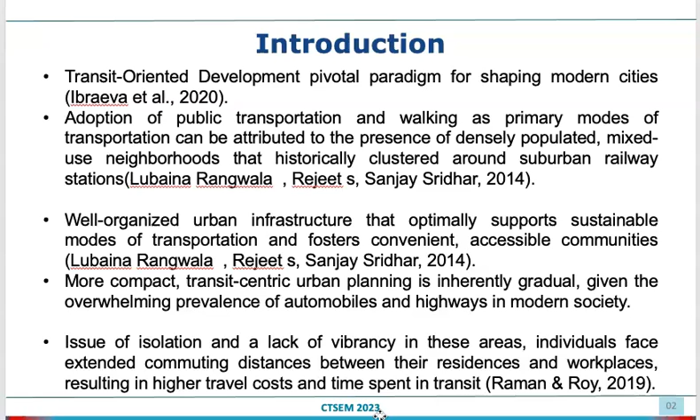So the issue of isolation and lack of vibrancy in the cities can be solved through the use of transit-oriented development. So when we study the case of Delhi, the youth are put to death in road rage. So when there is private transport, there are more chances of road rage or road accidents, and it will also lead to more traffic congestion when more private vehicles run on the roads. Then it creates a lot of traffic problems. But when public transport is promoted, then this traffic problem can be better handled.

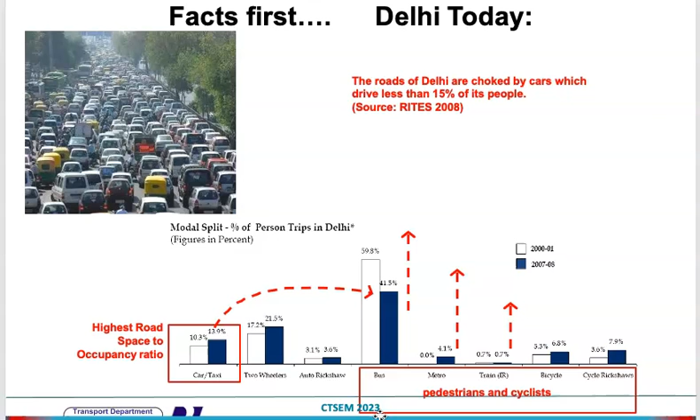So in today's world, the pedestrian and cyclist numbers are very low in metropolitan towns like Delhi. The modal split of person trips in Delhi, you can see from the figure, is very less as compared to other towns.

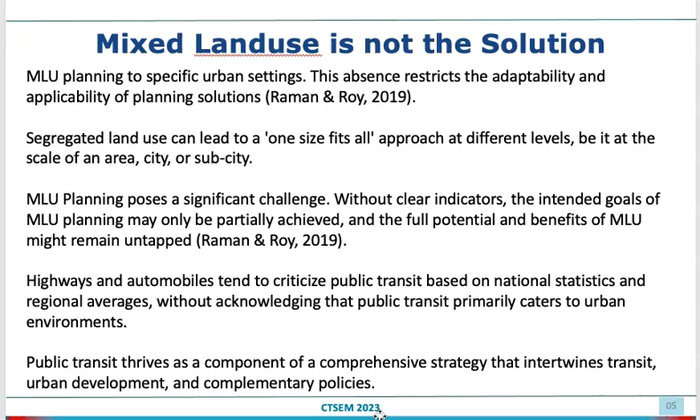So mixed land use alone is not the solution. Multi-level mixed land use planning in an urban setting is something that has been promoted by other scholars. Segregated land use can lead to a one-size-fits-all approach, which is not suitable in many towns. So mixed use development can be better promoted if it is integrated into transit-oriented development.

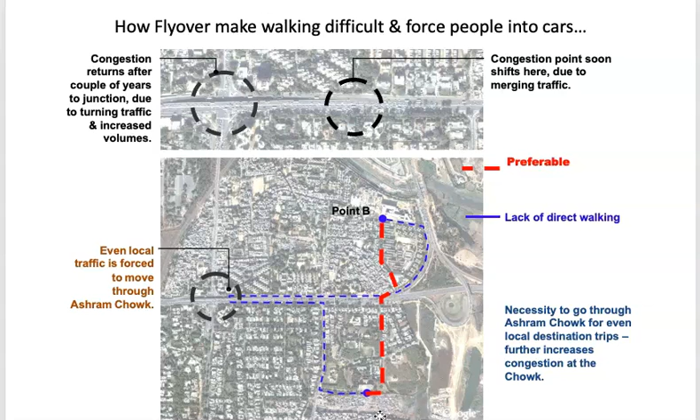How flyovers make walkability difficult and force people into cars. So when you see the case of Delhi, there are many flyovers which prohibit walkability, because when you have to cross from one road to another, you have to go a long way to find a way to cross the road. So this creates problems in walkability.

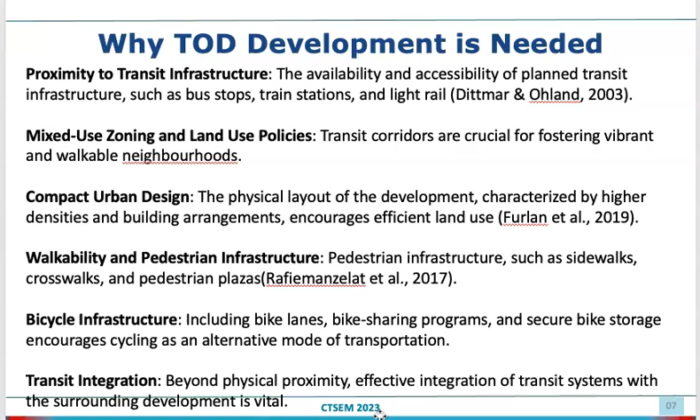So the urban physical layout of the development should be planned so that it is more compact, and it should be enhanced by walkability, and pedestrian infrastructure should be promoted so that people are encouraged to walk. They use sidewalks, crosswalks, and pedestrian plazas so that walkability is increased. Bicycle infrastructure should be improved, and transit integration should be done.

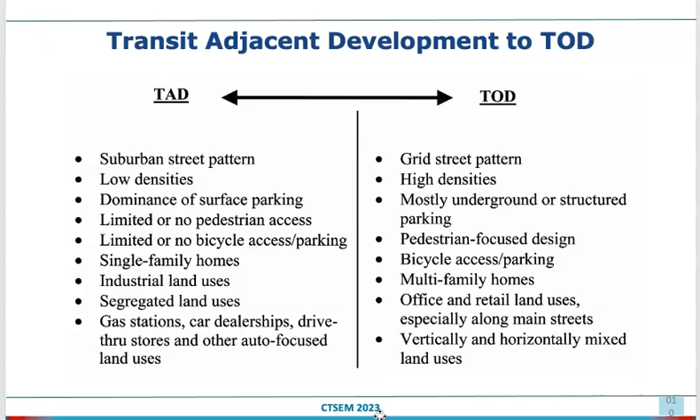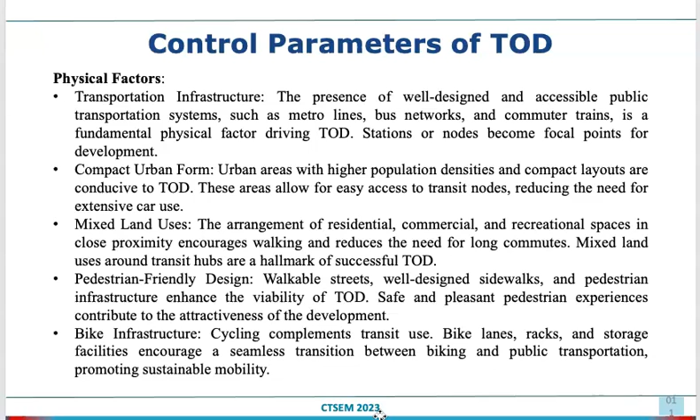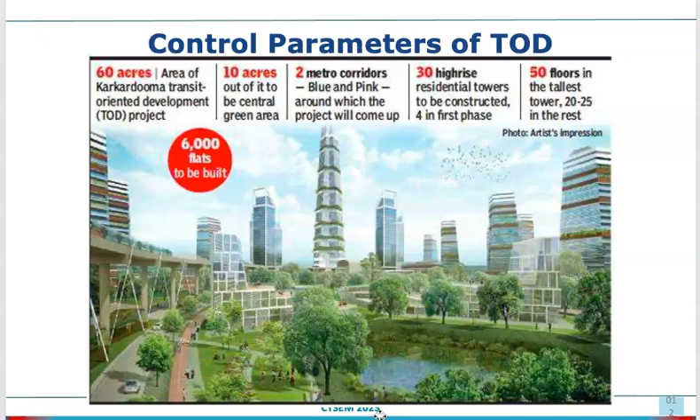So what are the control parameters that define transit-oriented development? There can be physical factors like transport infrastructure, compact urban form, mixed land use, and pedestrian-friendly design. Control parameters will define how the city is adopting transit-oriented development. Control parameters can also be factors like quality of life. People are more motivated to have a better quality of life.

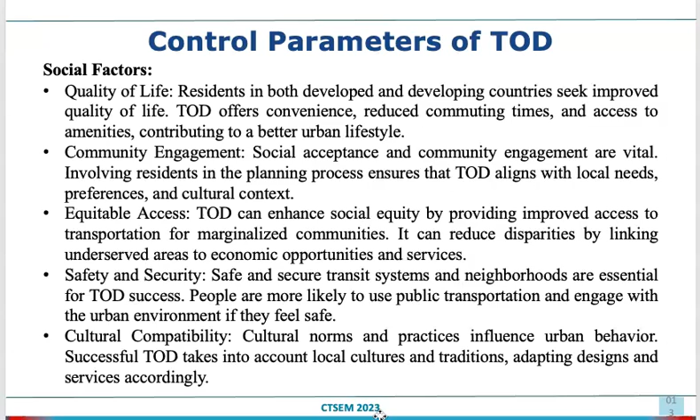There is community engagement; when people live together or nearby, they have better interaction, equitable access to public facilities, safety and security for the community, and cultural compatibility, and this is achieved where mixed use is developed. So the control parameters can also be economic factors like property value increases.

When an employment opportunity is created, people will find a job opportunity nearby. Reduced transportation cost can also promote transit-oriented development. Increased tax revenue generated by government authorities and development authorities can also promote TOD. Affordable housing can be provided only when transit-oriented development is done.

So in the case of Delhi, you find that along the major transit corridors like the metro corridors, the government is planning to enhance the FAR so that multi-story buildings can be created along transit nodes like metro stations. And in the zonal plan, in the master plan of Delhi, they have amended this so that transit-oriented zones can be created.

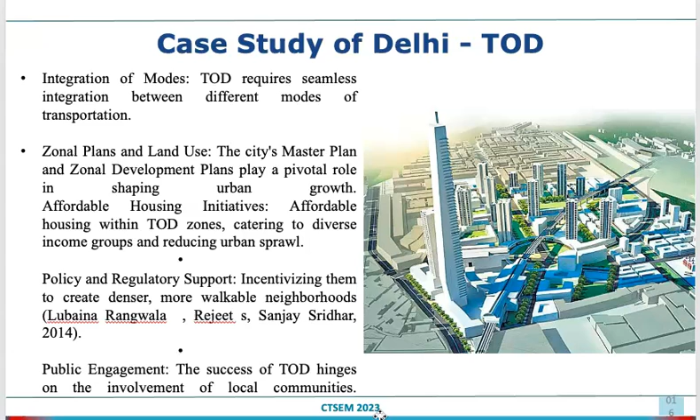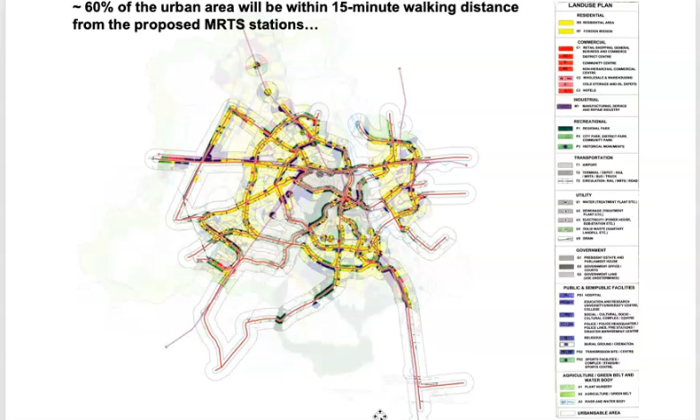Policy regulations have been developed, so you will find that along Delhi MRTS corridors high density development is being developed, so that 60% of the urban areas will be within 15-minute walking distance of the MRTS stations, that is metro stations or bus stations. So we find that technology integration is very important for enhancing TOD development in a city.

Bus rapid transit systems play an important role in smaller and medium towns where the population density increases beyond 10,000 population. Cleaner fuel options, if CNG, natural gas as a fuel, is available, will also promote the adoption of TOD.

Last mile connectivity: if we want to improve last mile connectivity and integrate city buses with other modes of transportation such as metro and suburban trains, then we can provide passengers with more convenience and multiple options to use public transport, and this will also lead to the development of more integrated transit-oriented development.

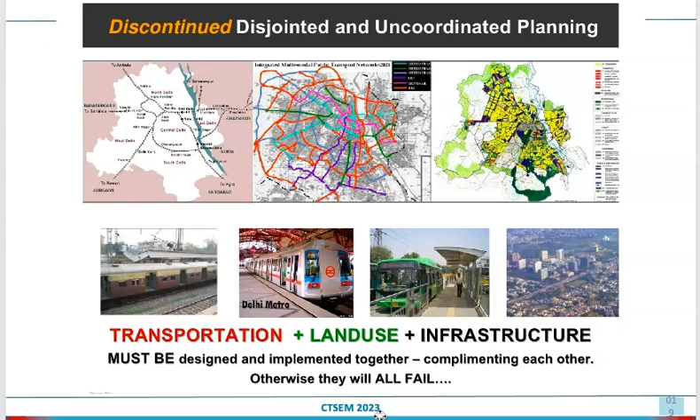So this is how disjointed and uncoordinated planning should be avoided, and we should have more enhanced integrated planning, where transport, land use, and infrastructure are integrated so that high density development takes place along the major public transit. These are the references that we have used.